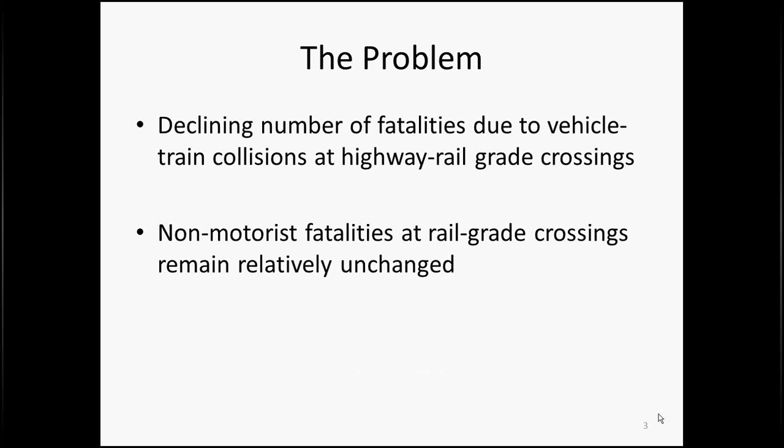Why is this a difficult problem? Because, as we said, the trend is not declining, despite the fact that the drivers' number of fatalities and incidents have declined over the years. It's a difficult problem for all these reasons that you see on this slide. Pedestrians violate at different locations at grade crossings. It can happen within the area of train stations or away from train stations. And also, depending on the type of rail tracks, whether there's commuter rail, light rail or freight rail, would require different countermeasures.

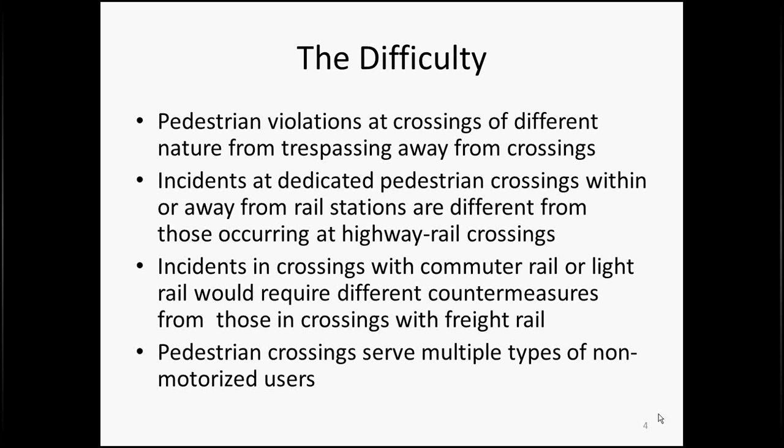And also the pedestrian crossings by themselves serve different types of non-motorized users: pedestrians, walkers, people with strollers, teenagers with skateboards or rollerblades, even equestrians sometimes. So for all these reasons, it's difficult to provide a single set of countermeasures to address this issue.

So what we know from the literature about these pedestrian fatalities at rail grade crossings is that most of the time alcohol and drugs are involved, meaning that the pedestrian users are under the influence when incidents and especially fatalities happen. Also, the typical pedestrian fatality is an adult, male, and of Caucasian origin, and about a quarter of the incidents are suicides. For countermeasures, we found fencing, landscaping, and warning signs to be, relatively speaking, effective in dealing with trespassing.

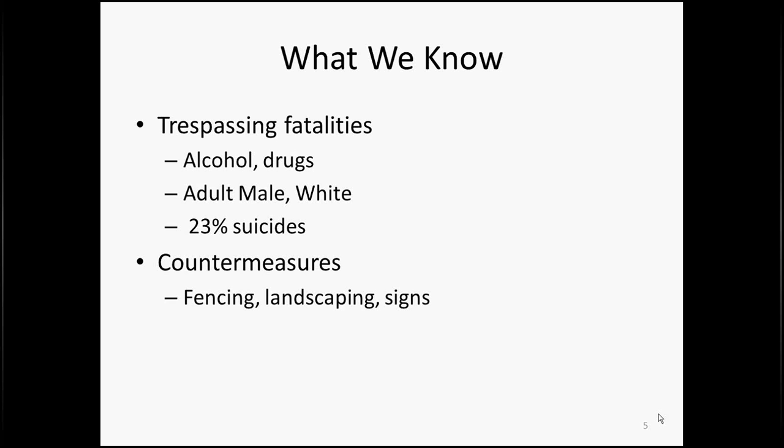Regarding warning devices, we have tried many types of warning devices: warning signs, short gate arms, channelizing devices, swing gates, zigzag gates, and all types of devices. And the research has shown that active devices seem to be more effective than passive devices. By active devices, in particular, we mean the train-activated signals and the relatively new, recently installed, at least in our region, second train coming active device. So these active devices have been proved to be relatively effective in reducing risky behavior on behalf of pedestrians.

There are various factors that should be examined during warning device selection, and the criteria that are used in practice are collision experience, pedestrian volumes and peak flows, train speeds, number of trains, and railroad traffic patterns; the sight distance that is available to pedestrians as they approach the crossing, and the skew angle of the crossing relative to the railroad tracks. These are among the selection criteria that the diagnostic team has to consider while selecting the appropriate mix of warning devices. And this is what is done in practice.

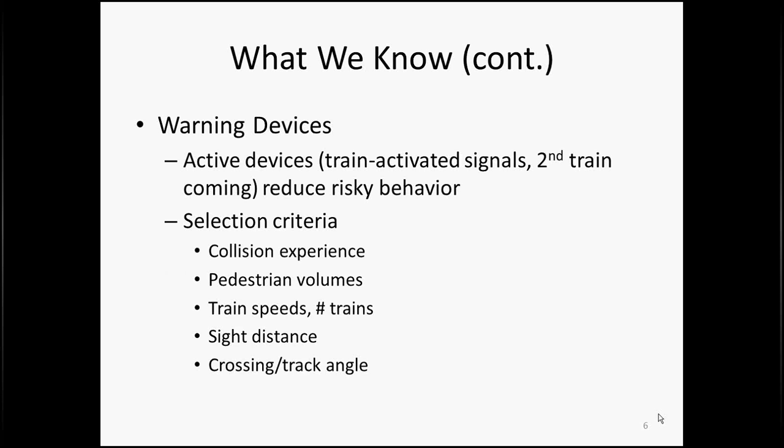Regarding accessible signals, by accessible signals we mean the devices that communicate information about pedestrian timing in a non-visual format. For example, audible tones, verbal messages, and even vibrating surfaces, as described in the MUTCD.

So all these signals have been deployed more or less in the regular intersections, as we know, but less so at pedestrian grade crossings. And there is more experience, I would say, from what we've seen in our research on accessible signals in other countries, especially in Europe, where they have done a lot more field research on accessible signals at pedestrian grade crossings, especially in the vicinity of rail train stations.

With the intelligent transportation systems technologies becoming mainstream, it's possible that we'll see some impact on the development and deployment of different types of technologies to alert the pedestrian users, pedestrians crossing the tracks, of an incoming train. And in particular, these technologies, we all know, are the vehicle-to-vehicle, the vehicle-to-infrastructure, and vehicle-to-consumer devices being developed. And we're probably going to experience some of that in the next few years.

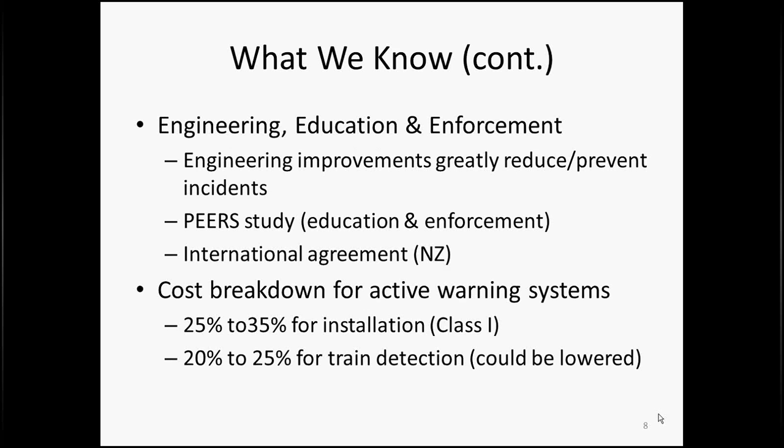Regarding engineering standards and guidelines, we can see some of the sources of these guidelines and standards that are available in the FHWA handbook, the MUTCD, the AREMA, the American Railway Engineering and Maintenance of Way Association Communications and Signal Manual, and also locally at various states that have codified some of these standards for their own use. And so we can see in California, for example, both Caltrain and Metrolink and CPUC, the California Public Utility Commission, are recommending these engineering standards and guidelines for their crossings in their state. And also APTA has come out and proposed a few standards for light rail.

The TRB has taken an interest and has documented in TCRP Report 69, which is available on the web, a decision tree for selecting appropriate treatments at pedestrian grade crossings. And internationally, a lot of research in the United Kingdom about a risk scoring methodology that evaluates safety factors at station pedestrian crossings. In Australia, we also have heavy use of risk type of methodologies. The particular model that is heavily in use there is called ALCAM, and it's one of only 4 operational models that account for pedestrian volumes. The rest of them usually account just for rail highway interaction, vehicles and trains.

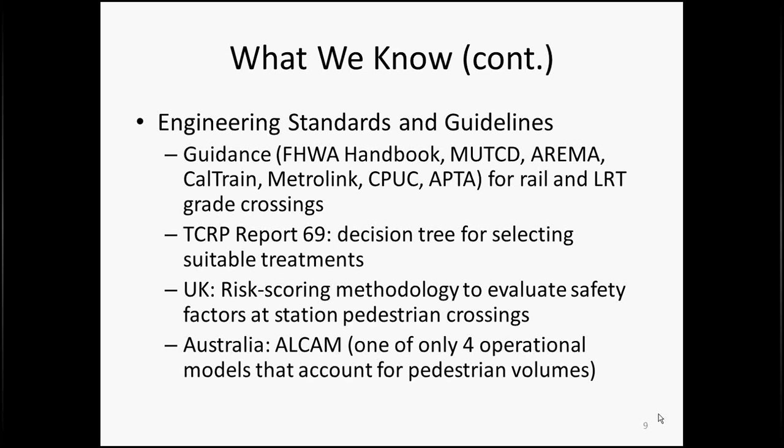So these are the general results that we find from the literature, and we try to document only those where there seems to be some general consensus. The rest of the presentation will cover some of the feedback that we received from the experts. And again, by experts, we mean the expert engineers who work for the state departments of transportation and utility commissions, and also consultants who work in the private sector.

What we find out is about the prioritization of safety upgrades for pedestrian crossings. Safety upgrades are usually prioritized based on a diagnostic review process, as we know, that examines a number of criteria, for example, the number of tracks, the engineering design, number of trains, the train speed, etc. And the decisions are usually based on a consensus among the stakeholders who are representing all the groups that have jurisdiction over the crossings and or are affected by operations.

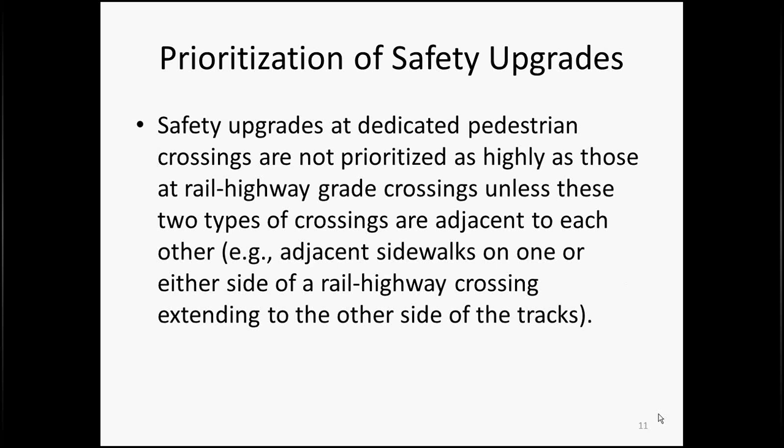However, the safety upgrades at the dedicated pedestrian crossings are not prioritized as highly, unless these two types of crossings are adjacent to each other and both serving vehicles and pedestrians on sidewalks. Another concern regarding engineering standards is that states that have substantial passenger, commuter, and freight rail operations are naturally leading the effort to develop guidelines and engineering standards for safety improvement.

In the longer term, it is likely that pedestrian safety at rail-grade crossings will benefit by the increasing consistency in standards for warning devices and treatments among the different agencies involved in pedestrian safety at rail-grade crossings. For example, as an example of standard consistency, the definition of advanced preemption in the MUTCD manual looks or should look the same as the one in AREMA publications and ITE documents, as well as APTA standards.

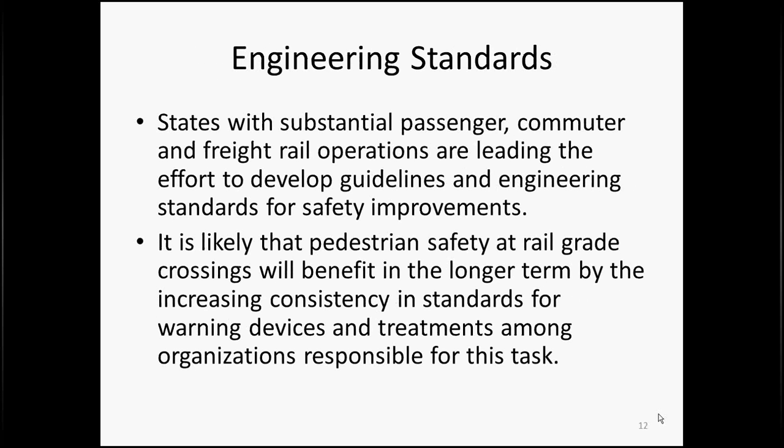And we'll see later, I believe, that this type of standards will merit a lot more attention with the advent of high-speed rail operations in the United States.

Another issue that the experts emphasized in our conversations with them was the reliability of cost estimates. We're finding out that it's difficult to find detailed cost estimates of actual costs. And that creates, of course, some difficulty in estimating the cost effectiveness of different treatments. And the reason that the experts told us is that it's difficult to trace this type of funding as they are absorbed in much larger projects, like, for example, grade separation.

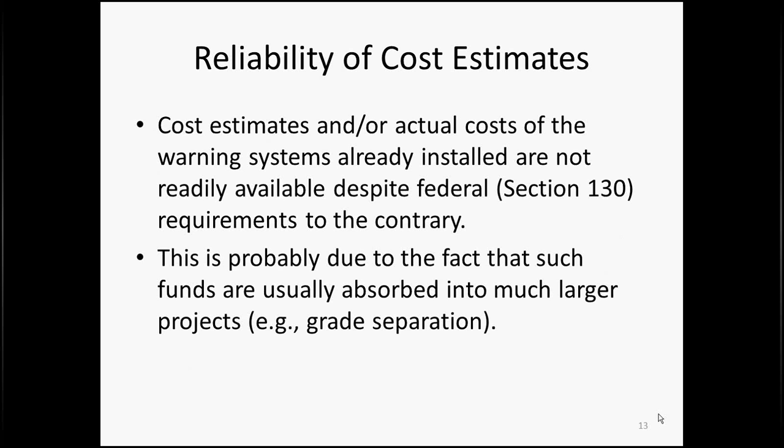And another reason is that it's difficult to have a detailed breakdown of this cost for design, installation, and maintenance, because this very cost breakdown is rarely finalized before the final stage, before the actual treatment is deployed on the field. So we can rarely see some agreement in the numbers at the design and build stage, and then in practice.

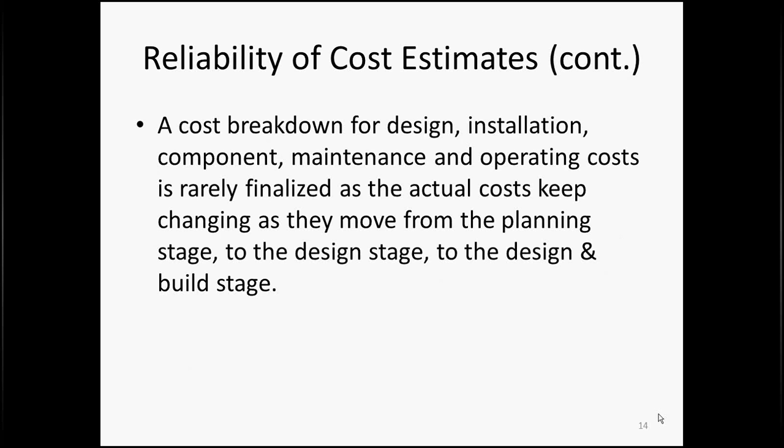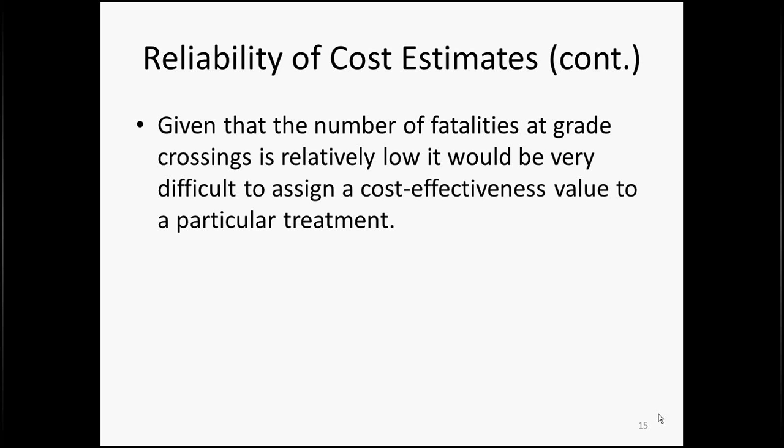Of course, one of the reasons, at least, that the emphasis is not there yet about maintaining detailed cost estimates is that the number of fatalities is relatively low and it would be rather difficult to assign the cost effectiveness value to a particular treatment, which is probably much easier to do with the high car volumes at rail highway crossings.

Also, the experts emphasize that we would need to provide for the state departments of transportation to provide cost oversight to effectively manage the scarce funding that comes their way for grade crossing safety.

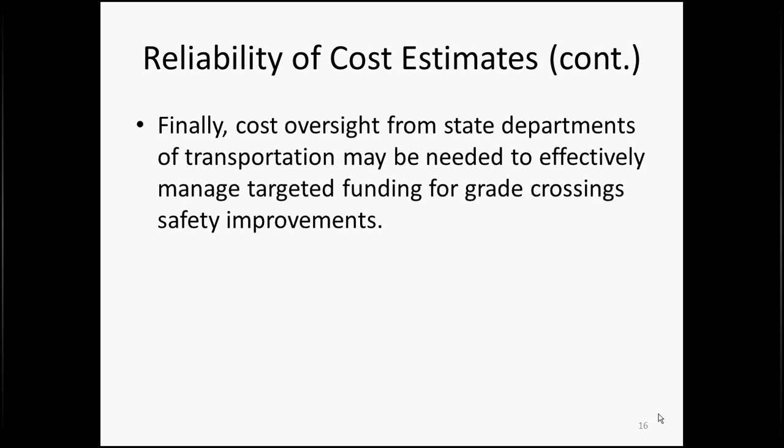Regarding the funding availability, we know that the vast majority of funding available for safety improvements is usually programmed for rail highway crossings and very rarely exclusively for dedicated pedestrian grade crossings. The experts believe that it would be critical that Section 130 funding remain exclusive to railroad safety and not rolled back with other highway funds.

And one of the benefits of doing that is that continuing this source of support will help maintain the level of expertise for rail safety at the FRA as well as the State Departments of Transportation, which is very critical.

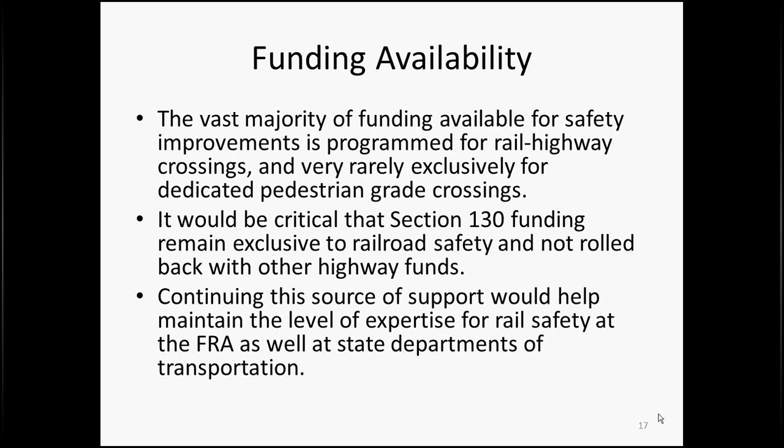The selection criteria: one of the weaknesses in the existing way of selecting the appropriate mix of safety treatments is that we have criteria that, based on experience, we believe are very critical in the operation of a particular crossing, but this multitude of factors is used in a rather ad hoc manner on a case-by-case basis, mainly because we don't have a reliable methodology to assess the trade-offs among the different criteria.

On the rail highway side of operations, we have the accident prediction formula, for example, that provides some trade-offs that fed into the assessment methodology that the FRA has produced. But the pedestrian side of things is not there yet.

And so, in practice, this process happens as a consensus building exercise among the diagnostic team members, and of course, we depend on the experience of these engineers so that they can deploy the right mix of treatments. But again, because of the funding scarcity, especially dedicated for pedestrian crossings, it would probably be more cost effective if we had some automated way of making these kinds of decisions.

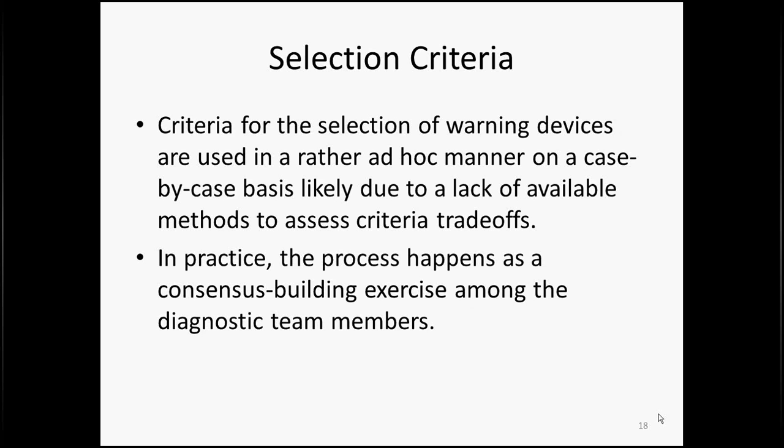The experts also noted the lack of accessible pedestrian signals, and of course this is due mainly to the shortage of dedicated funding of crossings. Another reason for the infrequent use of accessible signals at rail crossings is the lack of standardization among different manufacturers. Not that the manufacturers are that many, but they're not in agreement as far as the standards.

And of course, the standards are one of the purviews of the state utility commissions and departments of transportation. But obviously there will be some interaction between state departments of transportation and private industry to develop the appropriate standards for accessible pedestrian signals.

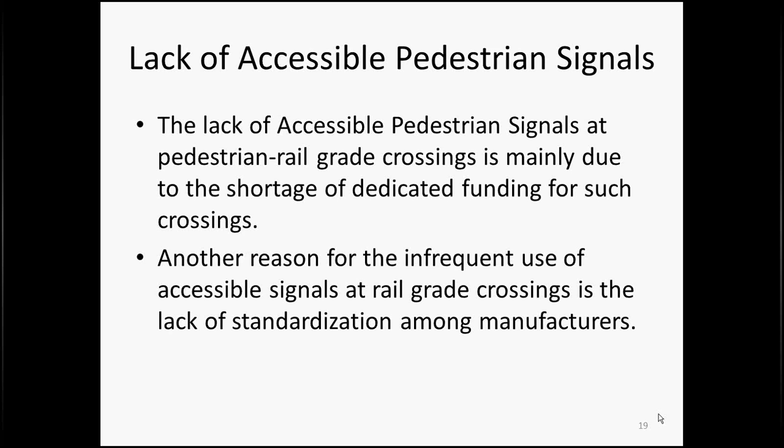The experts believe that education and enforcement campaigns are critical to continue maintaining a safe environment for pedestrians at rail-grade crossings. And of all the things, what seems to work is strong local advocacy and, of course, adequate funding for effective education, outreach, and enforcement campaigns.

The experts recommend that such campaigns should continue unmitigated, because what happens in fact sometimes is that because of the lack of funding, you have the campaign for a month or a week or two weeks, and then you have to come back the next funding cycle to repeat these kinds of activities, or after a major event. But it would be to the benefit of safe operations at crossings to have these campaigns continue unmitigated.

And also, at light rail grade crossings, campaigns at those locations probably would be more effective because of the additional support of the transit agency operating the light rail, and also of the users that are exposed to and familiar with the frequency of transit operations. Compare locations where you have exclusive freight operations, where the infrequency of freight operations gives pedestrian users a false sense of safety.

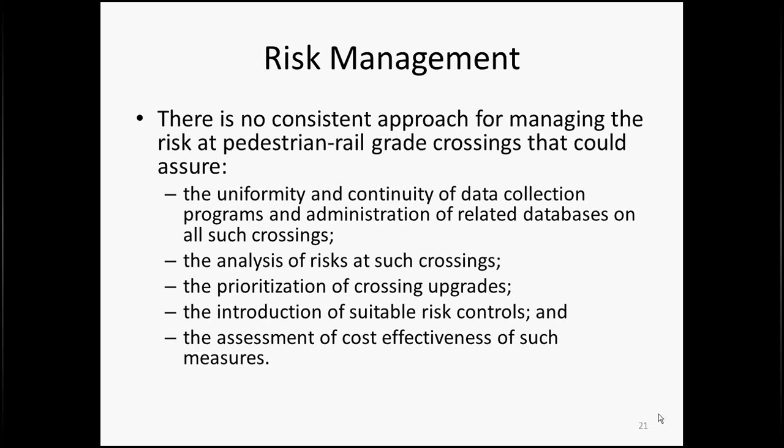Also, public and private stakeholders' responsibilities are an important factor, because determining the most suitable mix of safety upgrades is a challenging issue by itself. What makes it very challenging is that the public authority with jurisdiction over the crossing has an interest in selecting the most robust technology available to maximize the public investment in the long run. On the other hand, the private railroad installing the selected treatment is looking to minimize life cycle costs, of technology that will likely become obsolete before the end of its useful life and was expensive, so the public-private interests need to be balanced out.

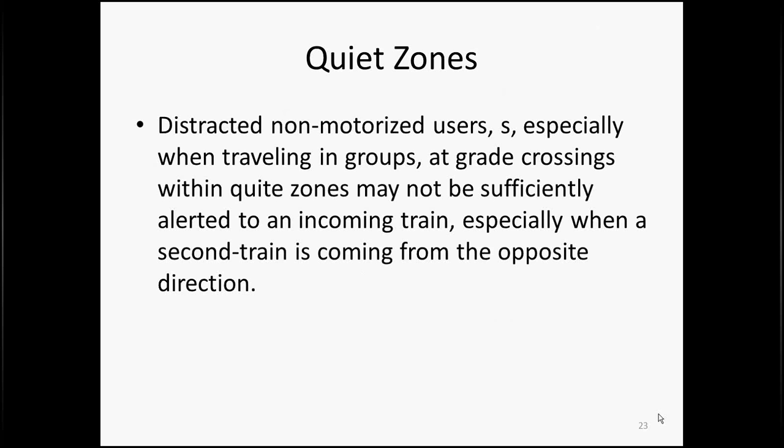Experts believe that quiet zones might not provide the same benefits to pedestrian users at crossings as to motorists. This is especially so in cases when pedestrians travel in groups and are distracted, especially when there are operations like a second train coming from the opposite direction to the one the pedestrian is moving.

Trespassing mitigation is a very difficult issue to address, but it remains a must if we want to advance pedestrian safety. This can be done by publishing the information recorded by railroad cameras; for the most part, this information is not available to the general public. This would have the side benefit of correctly classifying the location of incidents, since until recently many incidents were misclassified and attached to the nearest crossing, although they may have happened several hundred feet away. The FRA initiative toward improving the classification and properly locating those incidents will help with this task.

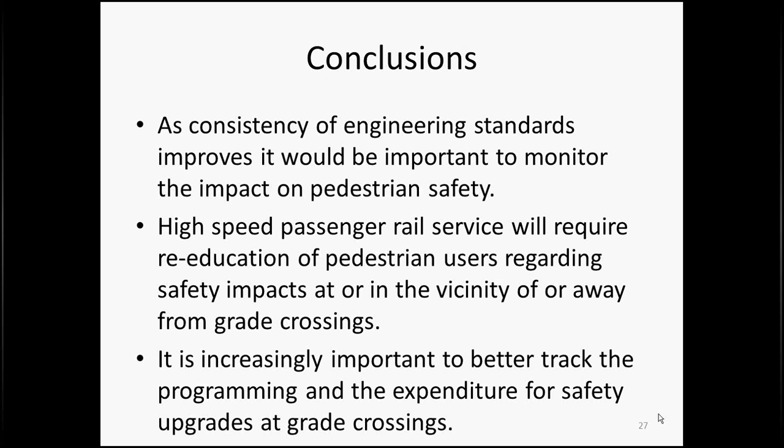In conclusion, we find that we need consistency of engineering standards, especially with the advent of high-speed passenger rail service, which will probably require some re-education of pedestrian users, either in the vicinity of or away from rail crossings. In times of scarce funding, it's increasingly important to better track programming and expenditures for safety upgrades at rail crossings. There is an additional need to develop a cost-effectiveness evaluation process to facilitate the activities of the diagnostic team, and it's very important to address the needs of users with disabilities.

We need to continue to provide adequate funding for local advocacy, education and enforcement activities. And we need to develop an appropriate risk management approach that will support the planning, programming, and implementation of safety upgrades at pedestrian rail crossings. That concludes my presentation, and I don't know if we have time for questions.